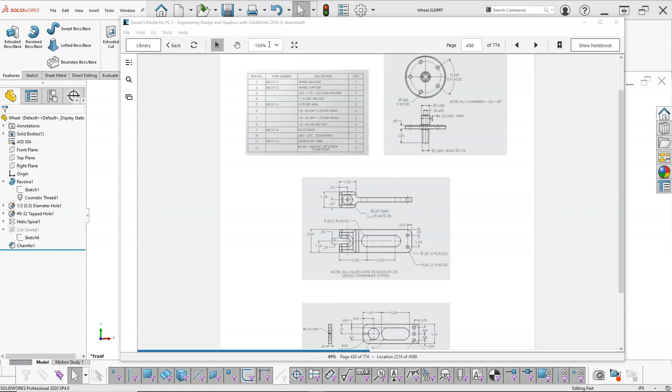Okay, given the naming, we're going to go with wheel support for this next piece, then probably the stationary arm for this piece, and the wheel bracket would be the one that it attaches to.

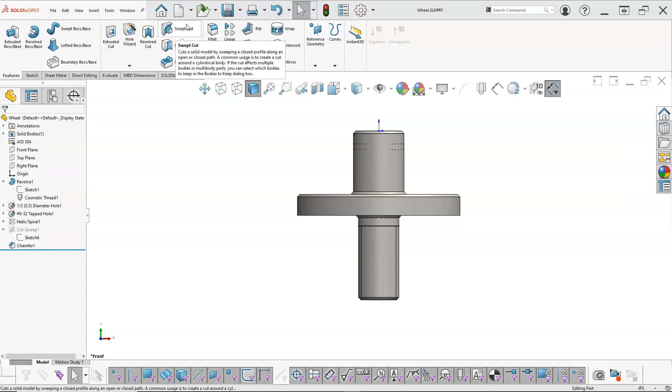So we'll open up a new part. We're still in inches. And let's go with the top plane this time.

If we want to use symmetry, go center line. This time I'll go horizontal and infinite length. And it doesn't really matter, or shouldn't really matter.

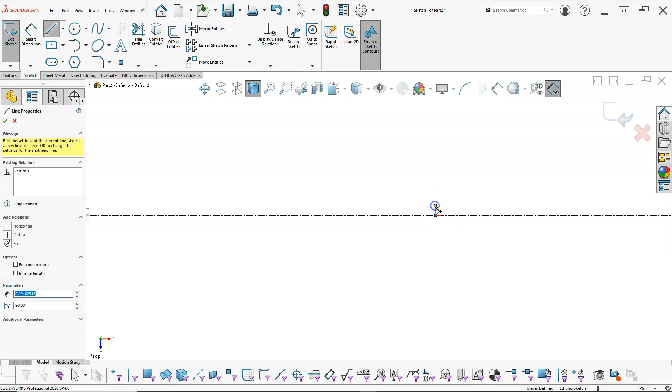So we'll do something like that. And then a window pick from right to left grabs everything, and we can mirror the entities.

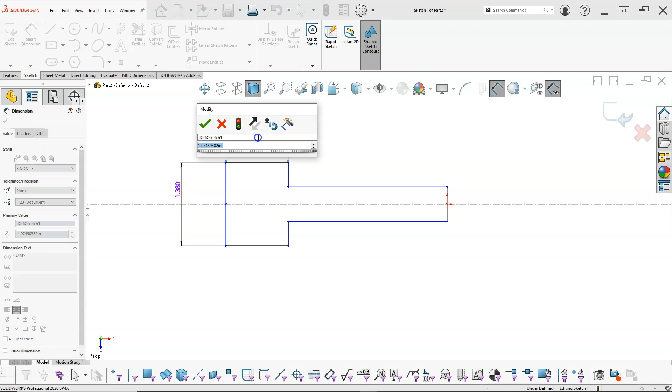Okay, so our overall is the 1.38 and 1.5. Alright, and given that this was the 0.69, thinking that this might be the 0.38.

So we'll see what that looks like. Well, amazingly enough, we're missing another dimension.

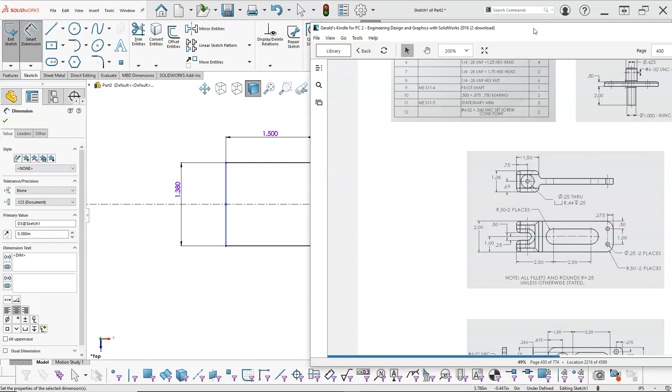2.5 and 2.5 for the slot, but then no overall dimension. So that doesn't look like another 2.5, but could be at least another inch.

So let's go with an overall of 6 inches. We can always come back and adjust that later. Overall height then is 2 inches.

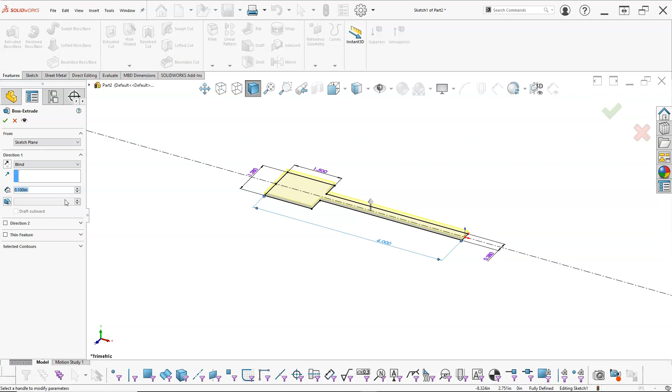Okay, we'll accept that. And let's go up a little bit on the zoom.

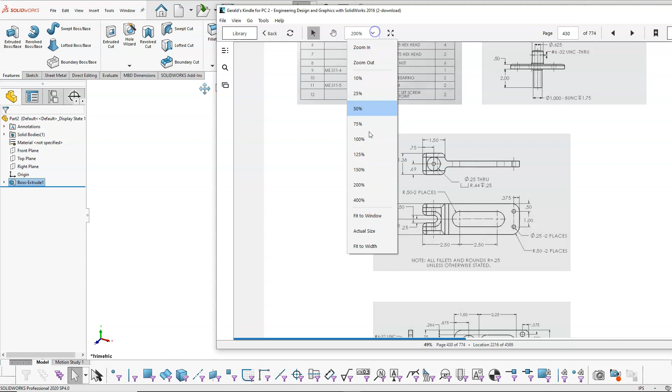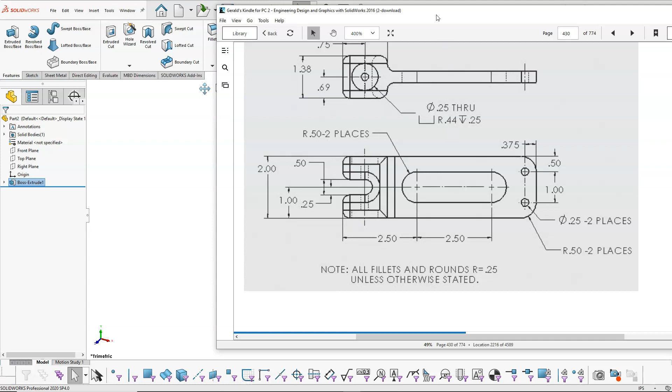Okay, so radius of 0.44, so diameter of 0.88. It looks like it's on both sides, so we'll wait on that one for just a minute.

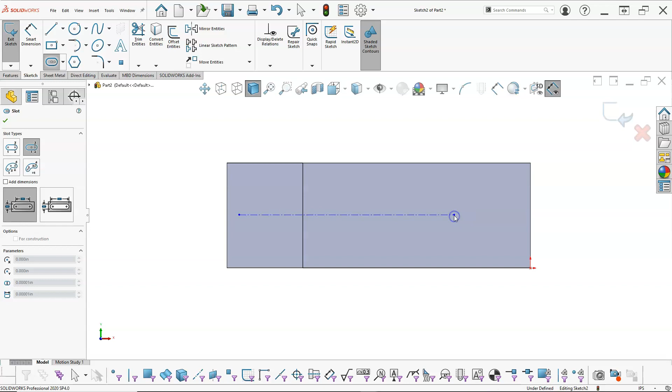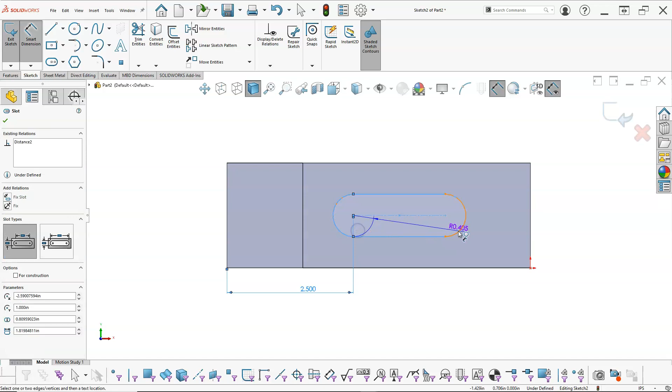So 2.5 and 2.5. So just kind of looking at the scale, might have been 1.5 inches.

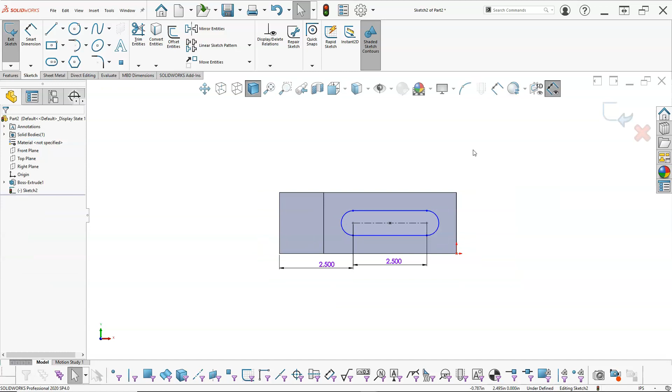So if I select the midpoint, I always want this centered. Select the midpoint, make those coincident. And then the radius is 0.5.

So features, extrude cut, and we'll just make it through all. So if you decide we want to be a little bit longer on the overall, we'll go up to 6.5.

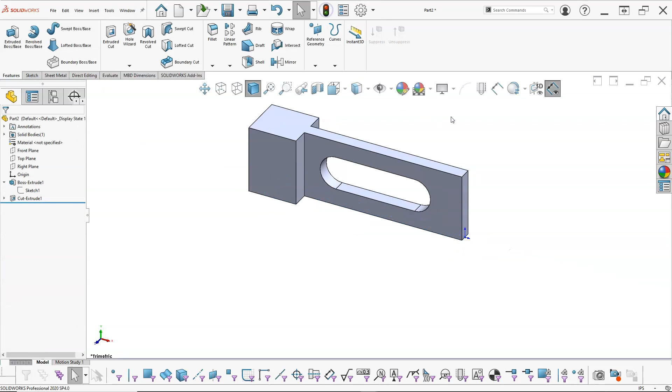Alright, there's not really enough math to work that back. So I still have potentially the slot.

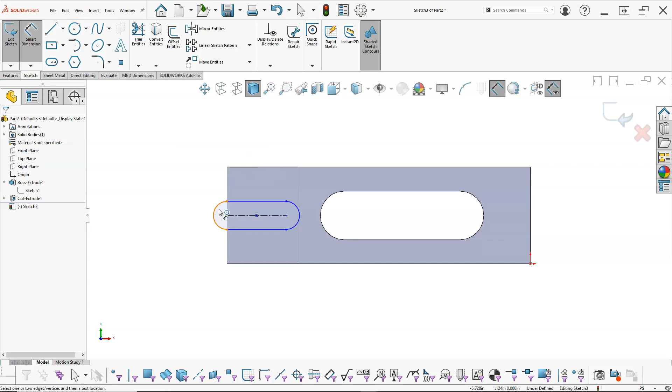So if I were to make that endpoint at the midpoint, and we have an overall of 0.5, so I'll go between the two, and then depth-wise...

Yep, still a stack up of all of those radiuses. So we had the 1.5 as an overall. So if we went back...

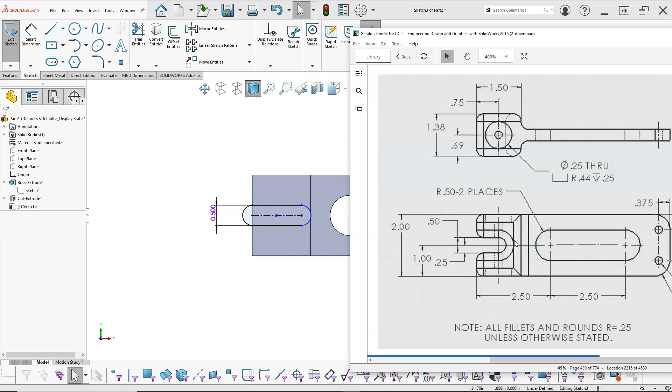1.5, 1.25, well, let's see, 1.5, 1.25, and then to 1 inch, so that would be about 0.75. We'll see what that looks like.

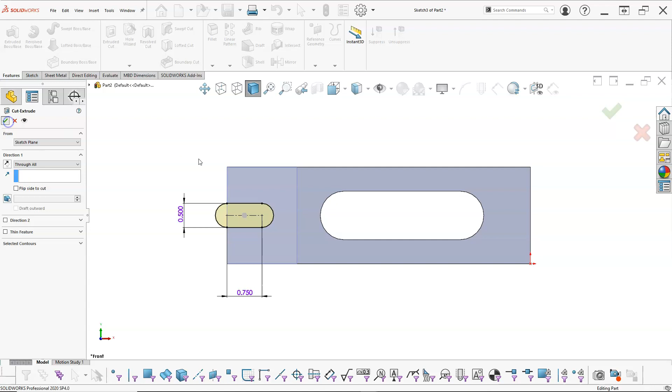Okay, and then that will be another extruded cut through all. And okay.

So we go from there to there, and the radiuses are 1/4 inch, then yeah, 1/4 inch radius plus another 1/4 inch radius would be the 1/2 inch. So that kind of plays out.

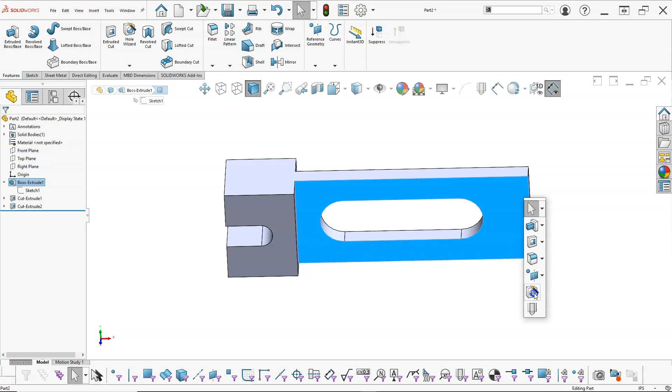We have the 2 hole locations, so we'll go to the hole wizard, 0.25 in 2 places, ANSI inch, through hole. Let's grab the fractional, put it at 1/4 inch, through all should be fine.

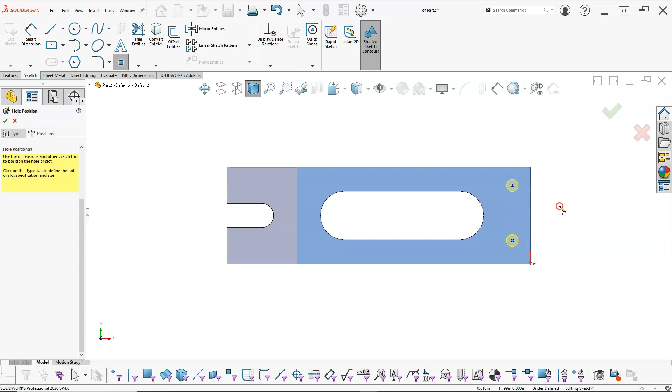Positions, smart dimension 0.375, 1/2 inch from the top, 1 inch between. Okay, and then this one's not going to go defined because at this point it can still move.

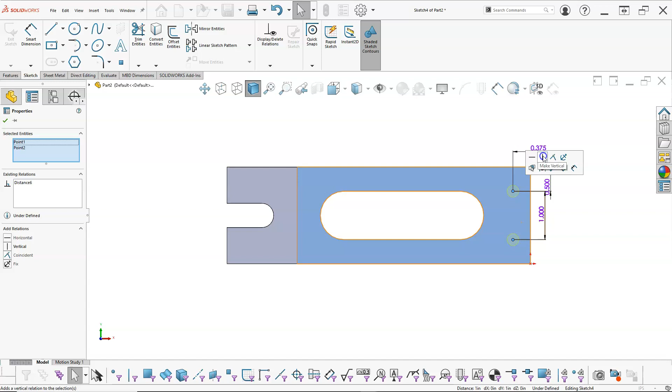So we'll go select, control select, and vertical, and then accept. Alright, I started the advanced hole, which is under the hole wizard, and I ran into a little bit of a problem with file locations because I have multiple versions piggybacked on this computer. So I had to find the file location and get that straightened out.

So when we do the advanced hole location, we have a top, so our starting location, and we're in inch, and I'm going to use a binding head screw, and this will be for 1/4 inch so that it has the through hole. And then we go to customize the sizing. This is our 0.88, and we're going to be 0.25 deep, and then we'll start to see it develop the hole callout.

So spot face, diameter. Alright, I need to insert an element below, and that's going to be the through hole. And so 1/4 inch diameter. And for one of the problems I was having was it not terminating correctly, so I need to double check the logic. But if we stop the hole short 0.25,

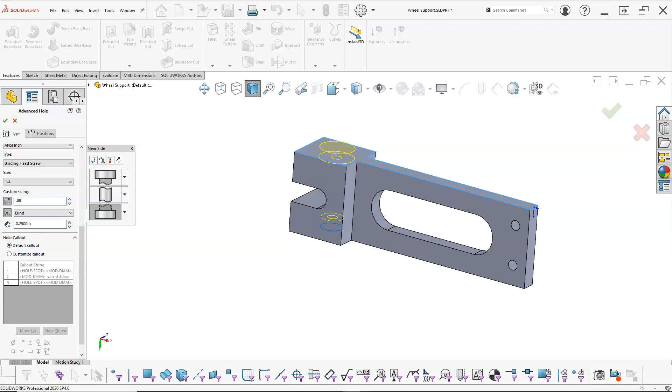Then the third element will be another counterbore facing the opposite way, and that one will have a depth of 0.25, also with a 0.88, and then we need to position.

Alright, so I already have a location. Maybe not. Let's go back into the point and place it. Alright, and then we'll double check. So we can go horizontal, and then 0.75 from the end.

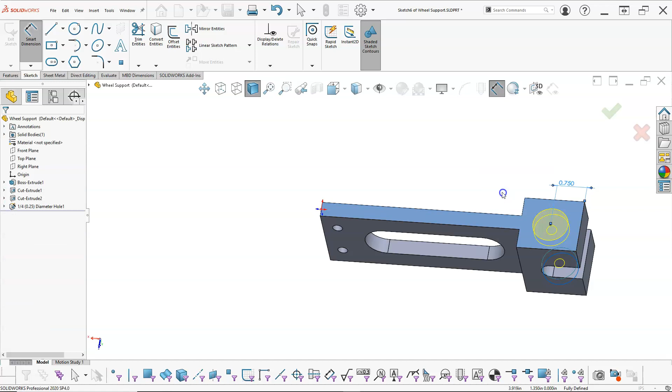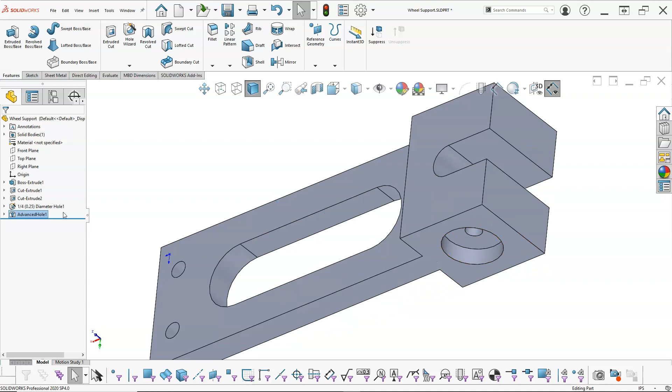Alright, so this takes the place, when it works correctly and we have figured out the logic, this takes the place of multiple hole wizard, counterbore, possible sketches. Alright, so we need to double check. If this doesn't show up, then kind of like the hole wizard, there's a profile sketch, and without offsetting the hole location, it pretty much put this geometry on the outside.

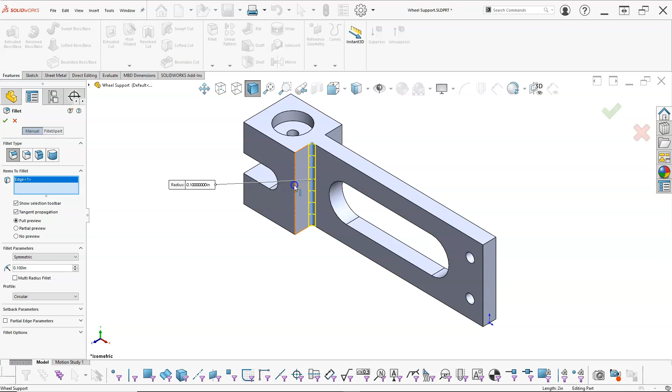Alright, so we're going to have to double check the depth, but let's go ahead and start putting in some fillets. Pretty sure I got all of the rest of the geometry. So these are going to be 0.1. So we'll start with just those, just to check the geometry.

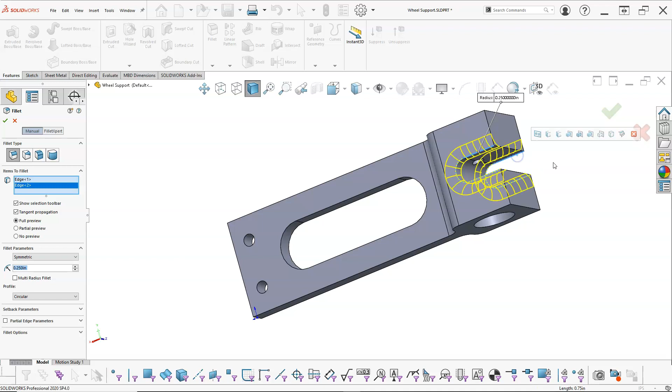Okay, so we'll come over and add the fillets, 0.25, so that gives me a location for those guys. And the problem here is going to be that it will try to find the tangency and end up with a blend error.

So I want to take that last one out. We may have to reorder. So that's kind of the danger, or the warning that comes with the fillets, is be prepared to go in segments so that you can control the order of the fillets.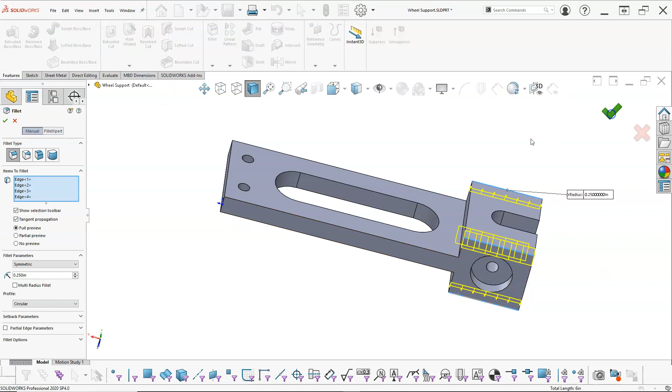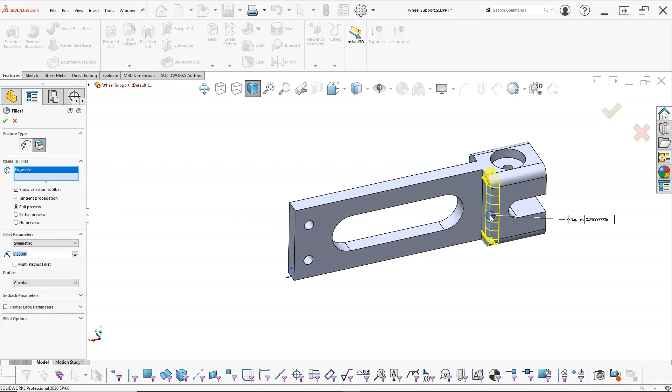So still 0.25. Alright, so if I roll forward, let's see what that does. Alright, so that got a little complicated with all of those edges, so we'll edit the fillet. Let me just clear those out and we'll see which one it's going to allow for. And so it's still finding its way around that way.

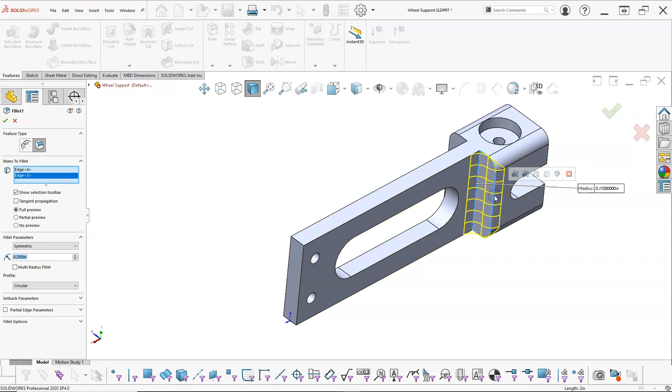So that one going over and back. Alright, so tangent propagation needs to be turned off. And we'll see if we can get those to blend out without having to do a more complex face fillet. Alright, so that looks pretty good. We'll roll forward, see how that blends.

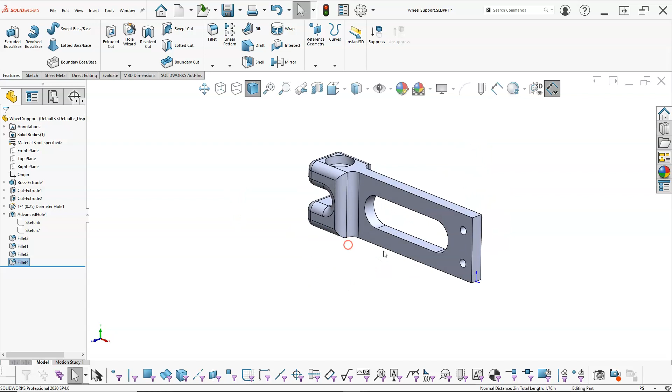Alright, and then top and bottom. Alright, so going through and picking all of those faces is going to get fairly complicated pretty fast, so I want to hold those in reserve. Alright, and then the last two fillets will be, I'm drawing here, I'm pretty sure it was a 0.5.

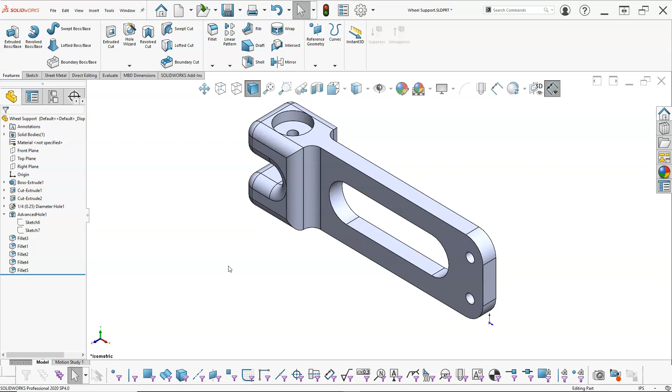So 1/2 inch on the end. Alright, so that looks pretty good. Looks like our drawing. We'll go ahead and save it and call that one good.